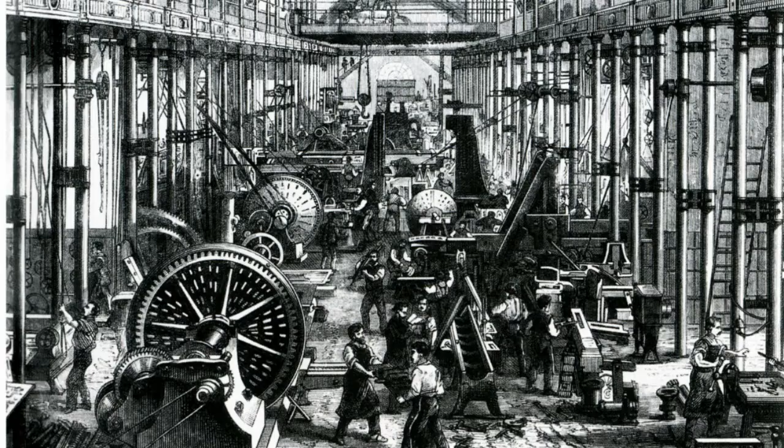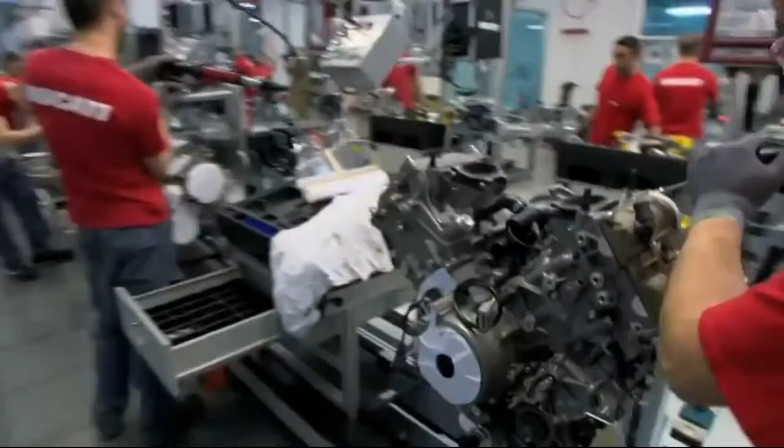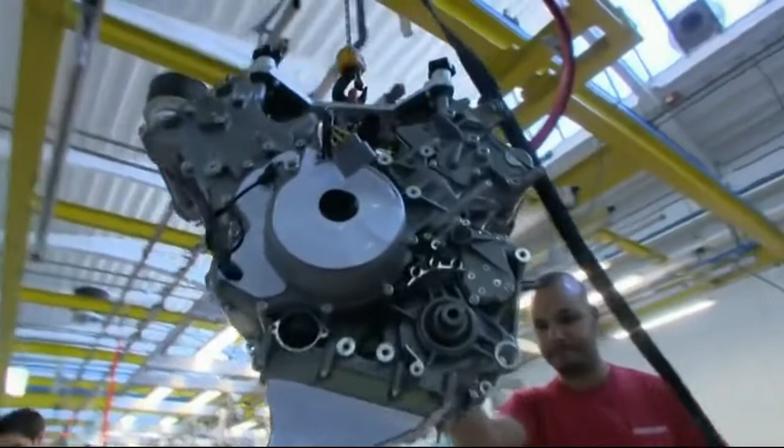Since the Industrial Revolution back in the 18th century, the machining and manufacturing processes have evolved a lot. But there are still tolerances in manufacturing even today. Every single engine that comes out of an assembly line has a slight variation in clearances and other specifications, which occur during the manufacturing of components. Due to these slight tolerances, the parts are not properly seated with each other. That's where the necessity of the break-in comes in. With a proper break-in process, the parts can be properly seated with each other.

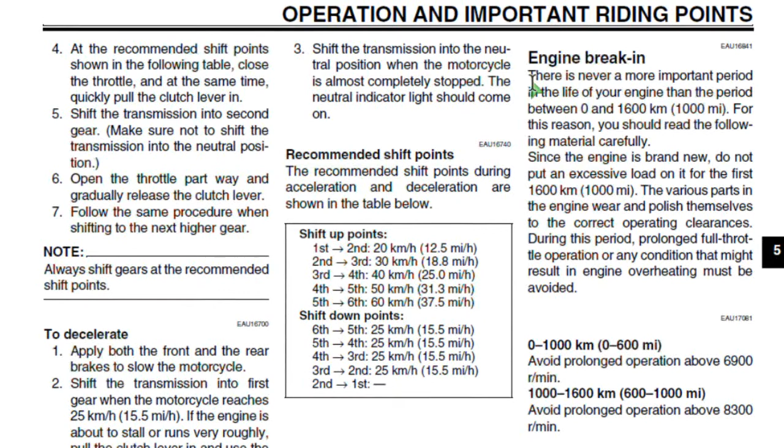But many riders tend to ignore the manufacturer's recommendation for the break-in process. In my opinion, that's simply stupid. I'll tell you why. Here's a passage from the Yamaha R1's owner's manual. There is never a more important period in the life of your engine than the period between 0 to 1600 kilometers or 1000 miles. For this reason, you should read the following material carefully.

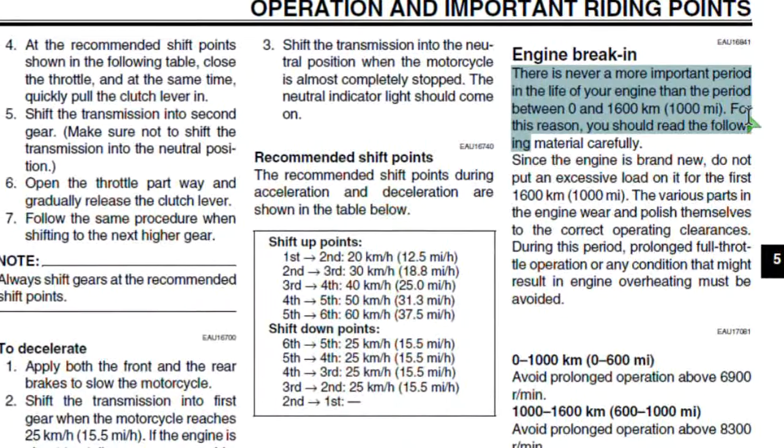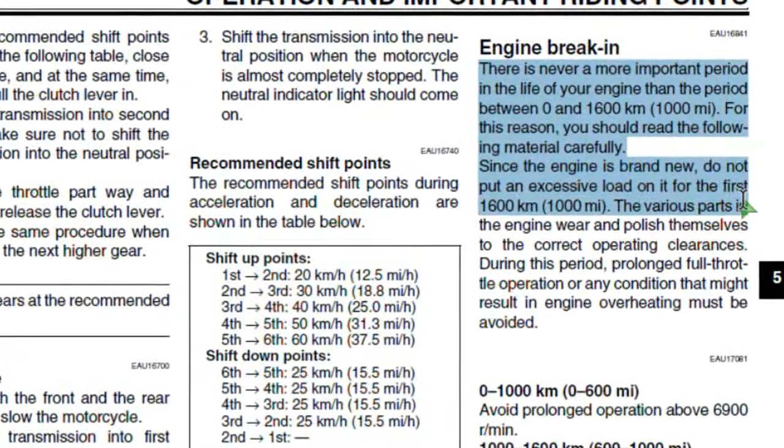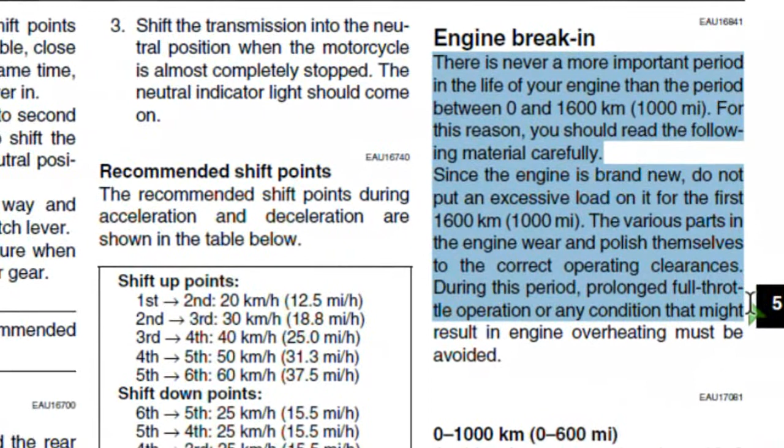Since the engine is brand new, do not put excessive load on it for the first 1600 km or 1000 miles. The various parts in the engine wear and polish themselves to the correct operating clearances. During this period, prolonged full throttle operation or any condition that might result in the engine overheating must be avoided.

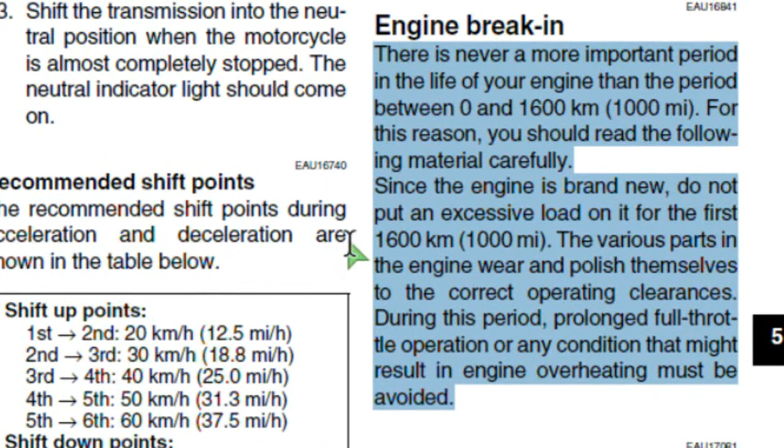Now, why do you think a huge motorcycle giant like Yamaha put such an emphasis on the break-in process if it's not a big deal? That's because it's important for the longevity and the long-lasting performance of your engine.

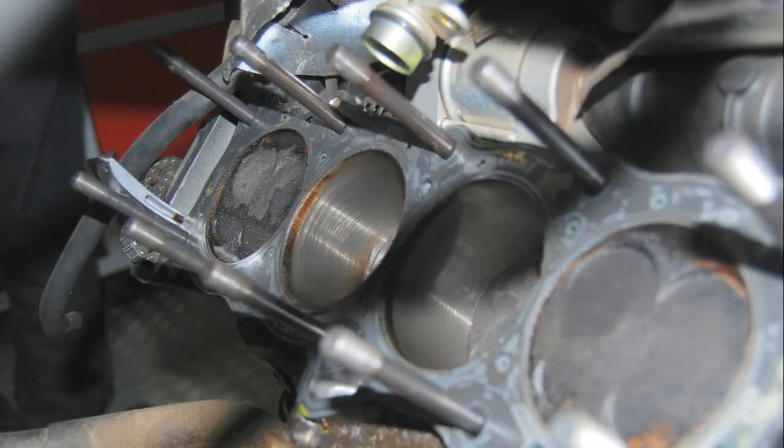If you ever inspect the oil drain during the initial service, you can find some metal bits both in the oil and the oil filter. Those metal bits are produced from gears, clutch packs and engine parts, including the bearings. If you continue to use that oil for an extended period of time, it will accelerate the wear inside the engine. That's why the initial service holds so much importance.

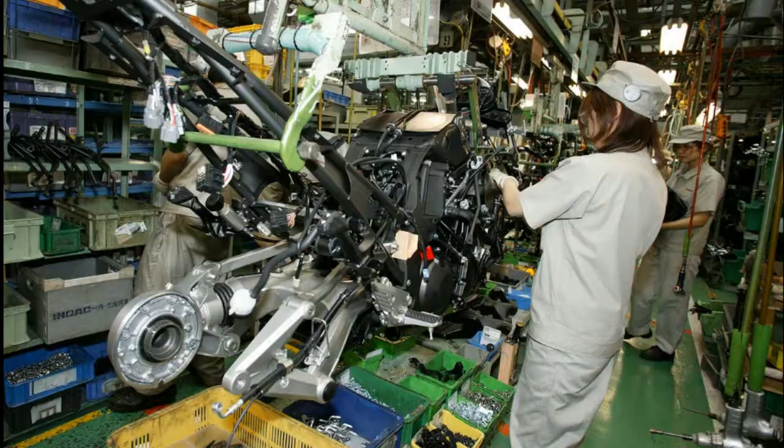But still, there will be people out there who disagree with everything that I've just said. But let me ask you this, who would you rather believe when it comes to explaining the needs of a particular engine, the manufacturer or some random keyboard warrior on the internet? Truth be told, no one understands an engine better than the people who design and build them. Here are the 5 steps to follow to properly break in your engine.

Number 1. Every manufacturer has a slightly different break-in procedure for their motorcycles. So, please read your owner's manual carefully. Number 2. Don't ever rev your engine to the red line. Also, avoid hard acceleration and braking unless it's necessary.

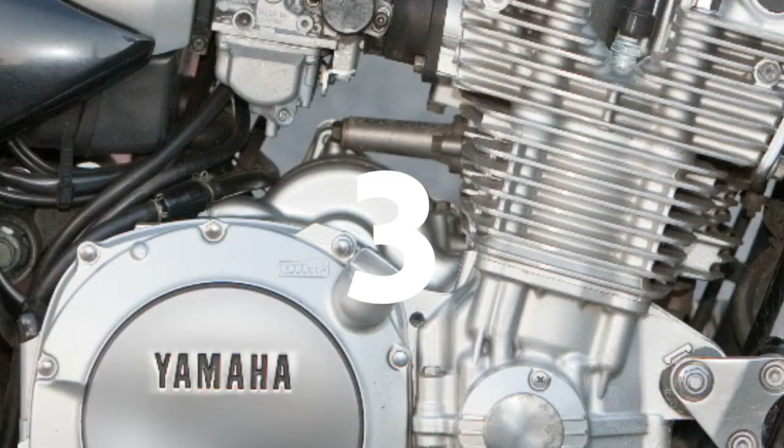Number 3. Avoid lugging your engine as it causes knocking. Always ride in the proper gear to avoid lugging your engine. Number 4. Avoid riding at constant speeds for extended periods of time. Vary the engine RPM and load within the manufacturer's recommended RPM limit as you ride.

Number 5. Stay with conventional motor oil for the first 1 or 2 oil changes, unless synthetic oil is recommended. With synthetic oil, the oil ring in the piston takes more time to bed in. So there you have it, the importance of the break-in process.